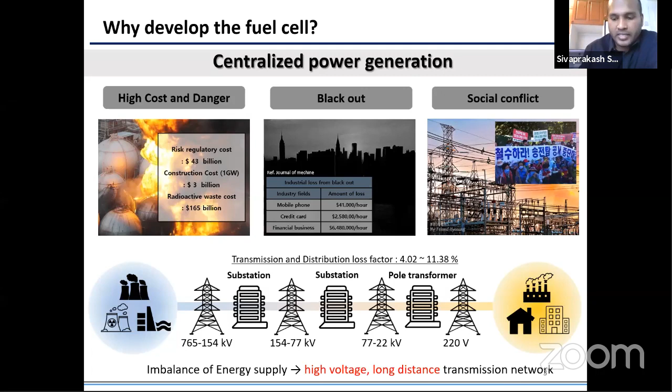Along with that, the transmission and distribution loss factor is also very huge, about 4 to 11%, from electricity produced at the power plant, from thermal or solar power plants, and then transmitted to the household. It takes about 4 to 11% loss factor. So this is the reason why we need to develop distributed power generation.

Here in Masdar City, UAE, they developed an off-grid system, which was not connected to the central power transmission. It was connected with localized power. And the second advantage is the construction of a localized power unit takes very little time; within a 1 year time frame, we can construct a megawatt power unit plant. However, construction of a thermal or nuclear power plant takes about 5 to 10 years.

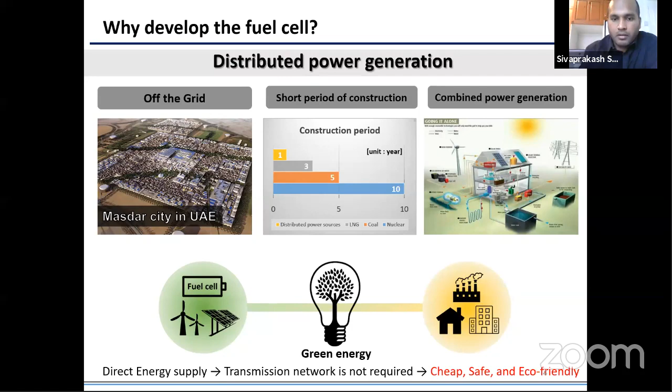Again, localized power generation, for example a fuel cell, can be combined with other power generation technologies, including solar, wind, and geothermal. And since energy is produced locally and it is green energy, it will not have any adverse or negative impact on the global environment.

So there are a variety of fuel cell choices available, including the polymer electrolyte membrane fuel cell, which operates at 70 degrees Celsius, phosphoric acid fuel cells, which operate at about 200 degrees Celsius, and molten carbonate fuel cells, which operate at about 650 degrees Celsius. Solid oxide fuel cells work from 800 to 1000 degrees Celsius. But the important thing is solid oxide fuel cells can cover the whole range from mobile applications to stationary power plants.

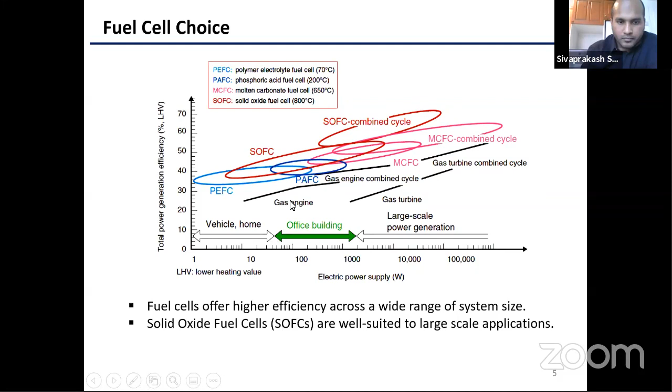Types of fuel cells. There are various types of fuel cells, classified based on their operating temperature. Solid oxide fuel cells work at 700 to 1000 degrees Celsius. The main difference is the electrolyte material. Here stabilized zirconia, a ceramic membrane, is used as the electrolyte, and the efficiency is about 45 to 65% for power alone. When combined with gas turbine engines to capture the waste heat, the efficiency can go over 90%.

The second type of fuel cell is the molten carbonate fuel cell, which operates at about 650 degrees Celsius. The electrolyte is molten carbonate, and the efficiency is only about 45 to 50%. Phosphoric acid fuel cells work at 200 degrees Celsius, the electrolyte material is phosphoric acid, and the power generation efficiency is 35 to 42%.

The fourth one is the polymer electrolyte membrane fuel cell, or PEM fuel cell, which works on an ion exchange membrane, for example the Nafion membrane, and the efficiency is about 35 to 40%.

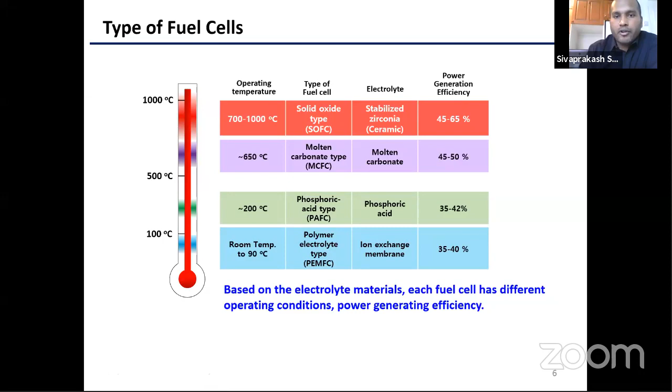Based on the electrolyte materials, we can use different types of fuels for the fuel cells. Among all the fuel cells, stabilized zirconia is an oxide ion conductor, where we can put basically any type of carbon fuels, hydrocarbon fuels or hydrogen. Whereas with the ion exchange membrane, we can only use pure hydrogen, about 99.9% hydrogen, as the fuel. But in solid oxide fuel cells, we can give all carbon or hydrocarbon fuels, which may contain sulfur or other contaminants.

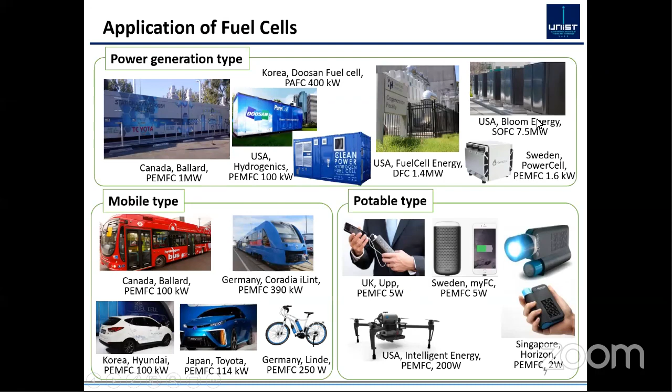Fuel cells are widely used. Applications range from stationary power to mobile power and portable power. For example, here in the US, Bloom Energy is the first company that started commercializing solid oxide fuel cells, and they were installed in many corporate offices, including Google, Tesla, everywhere.

The mobile type fuel cells are mainly used in electric vehicles and hydrogen-powered cars. They mainly use the polymer electrolyte membrane as the ion exchange membrane and pure hydrogen as the fuel. For portable power, there are startup companies available now, but it is still not commercialized.

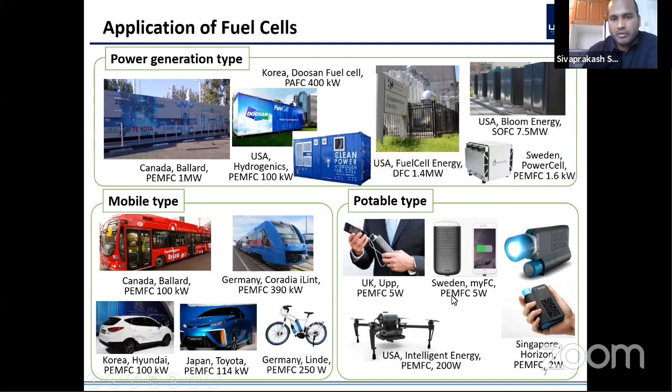I'm showing here the status of fuel cells around the world. Bloom Energy is the first company that commercialized solid oxide fuel cell technology.

Sorry that I put everything in Korean. I prepared this a very long time ago.

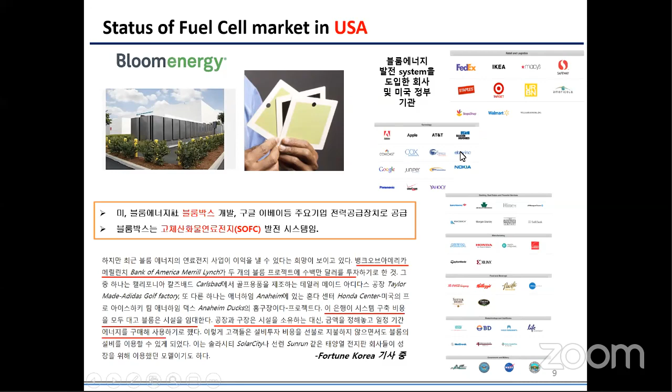Many corporate offices have stationary power units fully powered by solid oxide fuel cells, including tech company offices like Google. Newer companies like GE are working on solid oxide fuel cells, and they claim their efficiency is about 95% when waste heat is captured with gas turbine engines.

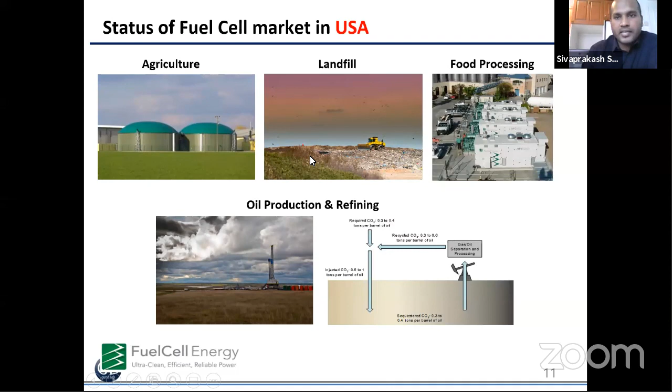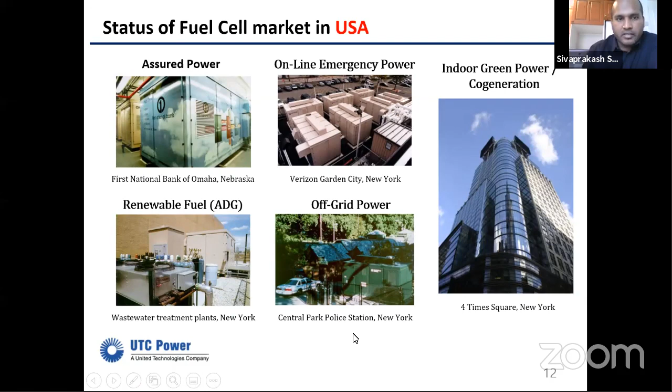In Japan, Kyocera is another company. They're working on solid oxide fuel cells with the LSGM electrolyte, a lanthanum strontium gallium magnesium based electrolyte material. This was combined with a home boiler, where we can simultaneously generate power and heat the home, thermostat controlled.

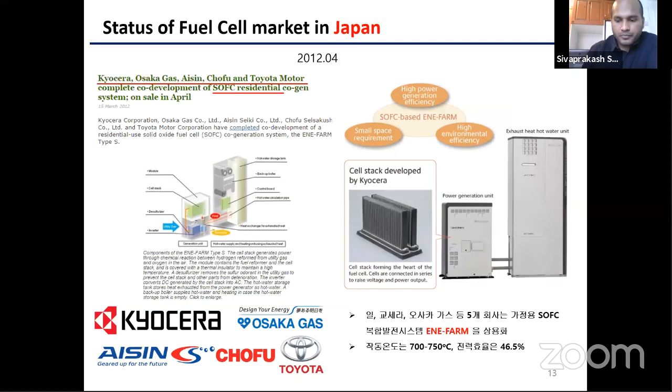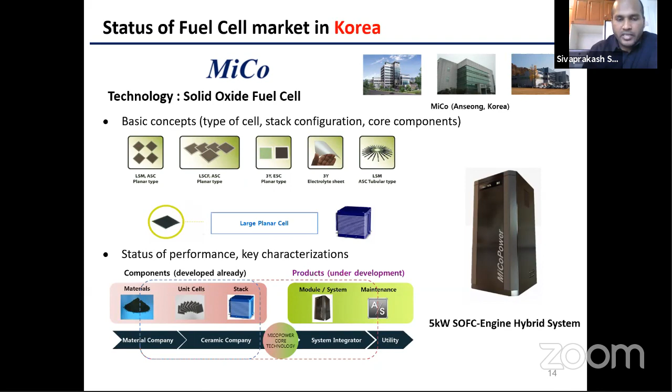In Korea, there is a new company called Mico Corporation. They started to develop solid oxide fuel cell technology. They are now at the stage of preparing the cells, and their plan is to construct a 5 kilowatt SOFC hybrid engine to install in various government sectors, particularly universities.

So I'm going to give an overall introduction to the basic principles of solid oxide fuel cells. Solid oxide fuel cells are electrochemical reactors which convert chemical energy directly into electrical energy. Like other types of fuel cells, solid oxide fuel cells have three main components: the anode, the electrolyte, and the cathode.

The anode is mainly composed of nickel and zirconia composite materials, the electrolyte is mainly composed of a stabilized zirconia ceramic membrane, and the cathode is composed of perovskite materials like lanthanum strontium manganite or lanthanum strontium cobaltite.

So in the cathode, first the oxygen gets reduced with the electron, and then moves towards the anode through the electrolyte, and then in the anode, hydrogen reacts with the reduced oxygen to form water, and then power is generated in the external circuit. Water is formed in the anode compartment.

Whereas many people are familiar with the polymer electrolyte membrane fuel cells. In polymer electrolyte membrane fuel cells, oxygen gets reduced in the cathode, and then the fuel gets oxidized and then moves towards the cathode, and then water is formed in the cathode compartment. Whereas in solid oxide fuel cells, oxygen ion is conducting from the cathode to the anode. Because of this reason, water is formed at the anode compartment.

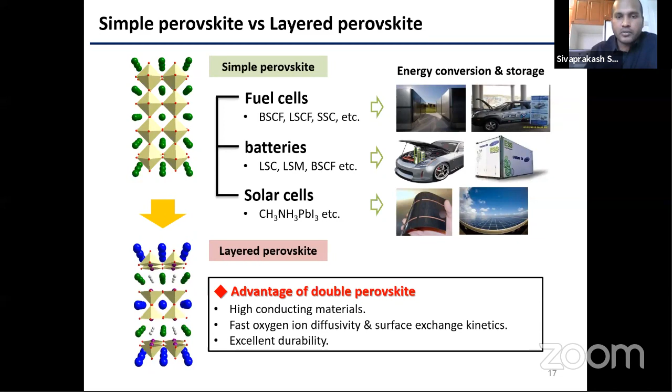So high conduction gives fast conduction of oxygen ions, and fast oxygen ion diffusion and surface exchange coefficient improve the oxygen reduction reaction at the cathode even when we decrease the operating temperature of the fuel cell, and it shows excellent durability. Durability means there will be no degradation even when operating the fuel cell over 3,000 or 6,000 hours.

So the simple perovskite structure is shown here, and the general formula is shown here, ABO3, where A is the lanthanide series elements, B is the transition metal, O is oxygen, and delta is the oxygen vacancy. Here you can see that lanthanide series elements are on the corners of the cube, and in the center of the cube is the transition metal. Oxygen is present on the octahedral sites, and oxygen vacancy is present here. So this vacancy basically gives the conduction mechanism to move the oxygen from one side to another side.

So various examples of simple perovskites are given here. Barium strontium cobalt iron: barium is the A site, strontium is also substituted on the A site, and cobalt iron is the transition metal on the B site. Here in lanthanum strontium cobalt iron, the lanthanide is the A site, and cobalt iron is the transition metal.

So for doping here, the oxidation state of lanthanum is 3+, and the strontium oxidation state is 2+. So doping a lower valence state on the A site, within the lanthanum site, creates the oxygen vacancy, which is the main path for oxygen ion conduction here.

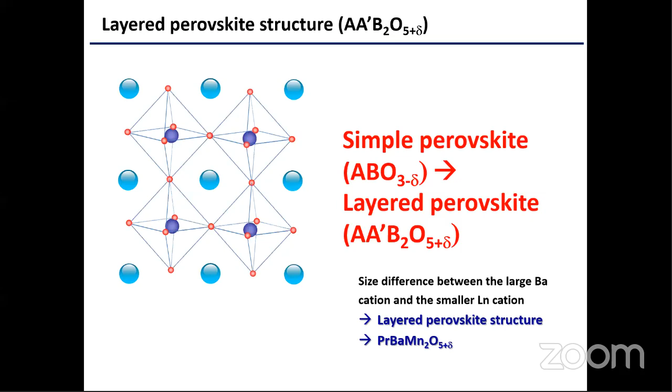As I explained before, I have shown here the simple perovskite structure. These are the A sites, and here is the transition metal B site, and then oxygens are present on the octahedral sites. So how we can visualize the double perovskite is when we start doping a higher radius cation in the A site. For example, in the lanthanum site, we start doping larger radius barium. The A site changes its structure from a simple perovskite to a layered perovskite structure.

Here you can see that these are the barium, these are the lanthanum series, and then the transition metal. Because of this, the layered structures are formed. In one layer only barium is present, and then here lanthanum is present, barium is present, lanthanum is present here. For this reason, we call this a layered perovskite material. This formed because of the size difference between the barium and the lanthanum cations. Here is the unit cell where we can see the double perovskite.

And then I will go to the electrode requirements. A good electrode should be catalytically active to allow operating at low temperature for oxygen reduction reactions and enhance the active site density. In the case of the anode, it should be catalytically active for hydrogen oxidation or fuel oxidation reactions. The second requirement is it should be highly conductive for electron transport, and at the same time it should be ionically conductive for oxygen ion transport.

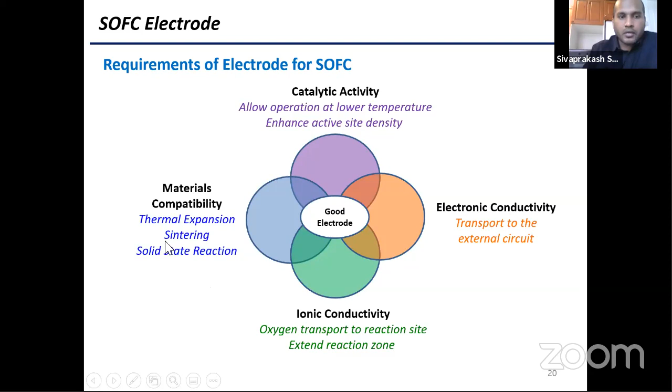And then the fourth requirement is the material should be compatible with other components of the fuel cell. For example, if the anode and electrolyte have different thermal expansion coefficients, after sintering or fabricating the fuel cell, the anode and electrolyte detach at their interface. So the material should be compatible with other components, so that there will be a low interfacial resistance.

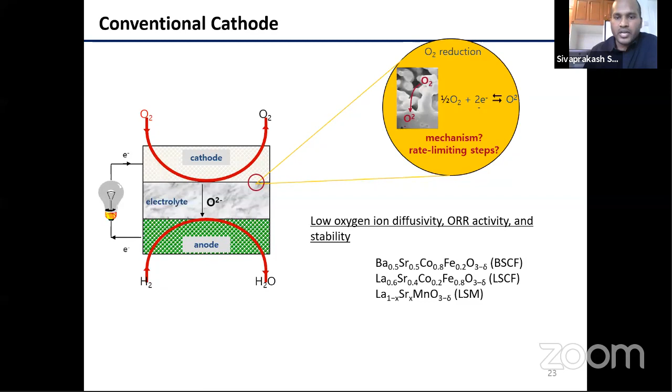In conventional cathodes, where barium strontium BSCF, LSCF or LSM materials are used, the main disadvantage is that the oxygen reduction reaction is very sluggish. Conventional fuel cells operate at 1000 degrees Celsius. When we decrease the operating temperature, the oxygen reduction reaction becomes very slow, and the overall efficiency of the fuel cell goes down. So we need to find a better cathode for the oxygen reduction reaction at lower temperature, between 700 and 800 degrees Celsius. So first we developed a layered perovskite material, praseodymium barium cobalt oxide.

This material shows high oxygen diffusion and surface exchange coefficients, D and K: D is the oxygen diffusion, K is the surface exchange coefficient. It has high oxygen transport kinetics. Doping a little strontium in the barium site increases the conductivity and the catalytic activity of the layered perovskite. But doing this, there are disadvantages: a large thermal expansion coefficient, poor stability, and high cost.

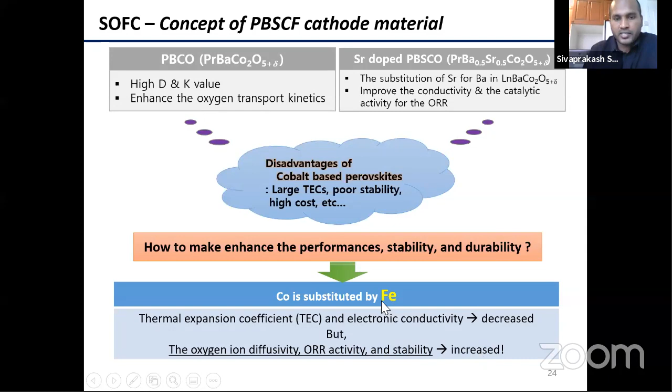Due to this, we started working on replacing the cobalt with iron, so that the thermal expansion coefficient will be matched. It shows high electrical conductivity. Although it decreases the electrical conductivity, it is still enough for current collection in the fuel cells. The second advantage is that the oxygen diffusion and oxygen reduction reaction stability was increased by doping iron in the cobalt site.

Then we found praseodymium, barium, strontium, cobalt, iron as an active cathode material for solid oxide fuel cells. So based on this, we fabricated fuel cells with ceria as the electrolyte. Instead of stabilized zirconia, we used stabilized ceria as the electrolyte, nickel as the anode, and praseodymium, barium, strontium, cobalt, iron as the cathode material. We performed the fuel cell test at 650 degrees Celsius. It shows about 3 watts power density. At low temperature, about 500 degrees Celsius, it's about 0.5 watts power density.

Next we checked the stability of this material. This praseodymium, barium, strontium, cobalt, iron oxide shows very stable performance over 100 hours, whereas without iron, it shows a sharp degradation. The simple perovskite BSCF also shows a sharp degradation when decreasing the temperature of the fuel cell.

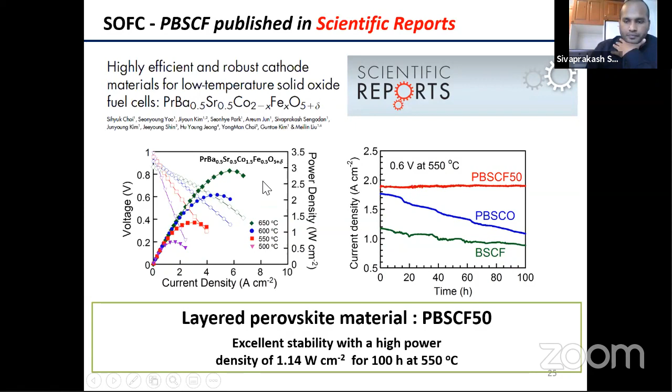Then we started working on layered perovskite materials to use as the anode material in solid oxide fuel cells. We found praseodymium, barium, manganese oxide as a very good anode material for solid oxide fuel cells. So a question arises: why do we need to develop a good anode for solid oxide fuel cells, although a very active nickel material is available?

This is the answer. In conventional fuel cells, hydrogen is used as a fuel. This hydrogen is produced externally by hydrocarbon reforming, or hydrocarbon can be directly fed into the fuel cells, where it needs internal or external reforming. Because of this, the efficiency of the fuel cell is decreased by 30%. But pure hydrogen is very hard to produce and expensive, and we don't have a good infrastructure to transport the hydrogen.

The next available option is hydrocarbon fuels. Can we use the hydrocarbon fuels directly? We can use our existing infrastructure, the pipelines or gas cylinders. The second advantage is that we have experience in transporting hydrocarbon fuels like LPG, methane or propane. Additional processing such as reforming can be reduced, so efficiency can be increased. Another advantage is that hydrocarbon fuels are highly efficient, cheap and useful. We can use LPG, methane, propane, octane, ethanol, even solid carbon.

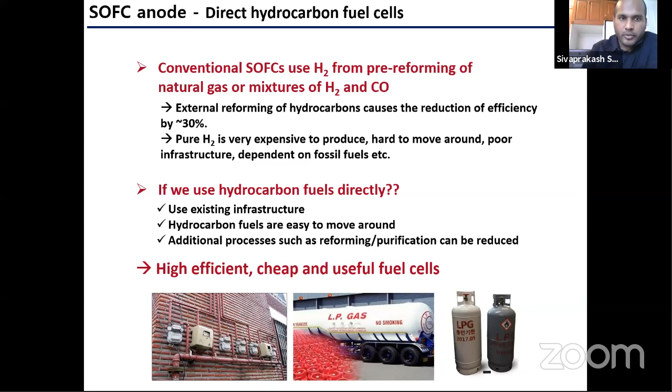But what is the disadvantage of using nickel as the anode material? The conventional anode is nickel and stabilized zirconia, a composite material ball milled in different 30-40 ratios, and then the anode is fabricated. It shows high electronic conductivity, excellent activity for clean reformed fuels, that is pure hydrogen, and is chemically and physically compatible with the zirconia electrolyte. It will not react with the other fuel cell components.

But when we use hydrocarbon as the fuel, it undergoes severe degradation because nickel is a very good carbon catalyst, so carbon fiber is formed on the nickel. This carbon fiber eventually breaks the fuel cell, even within 1 or 2 hours of operation. The second disadvantage is that we start with nickel oxide as the electrode material in the nickel cermet anode, and once we start operating the fuel cell, nickel oxide is converted to metallic nickel.

In metallic nickel, the fuel cell is operated. Once we decide to stop the fuel cell and shut it down, the nickel is again converted back to nickel oxide. Because this nickel oxide converts to nickel and then back to nickel oxide, a huge volume change occurs in the fuel cell anode. This volume change eventually breaks the fuel cell.

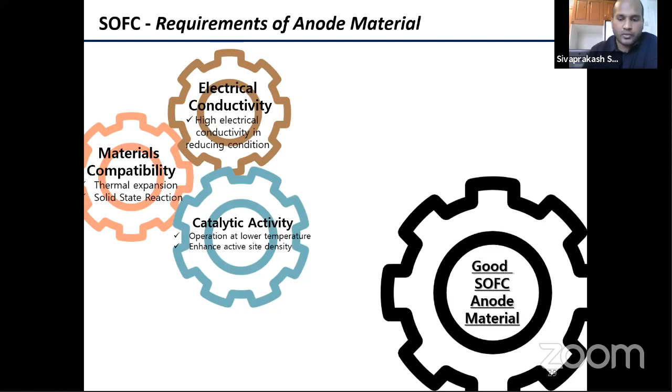A good fuel cell anode material should be compatible with the other fuel cell components like the electrolyte, matching its thermal expansion coefficient. It should be catalytically active for hydrocarbon fuel oxidation. It should be highly conductive to conduct the electrons from the anode externally to the cathode. It should show good carbon tolerance and sulfur poisoning tolerance.

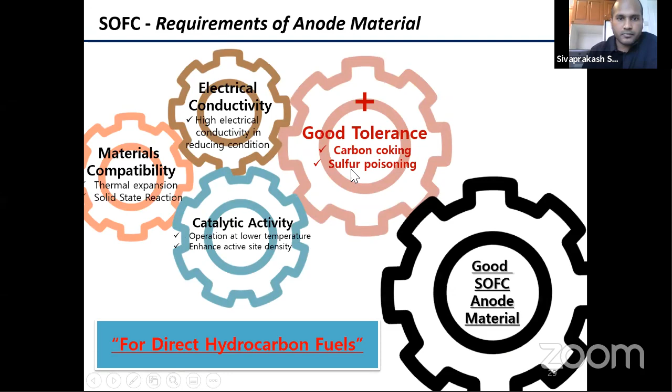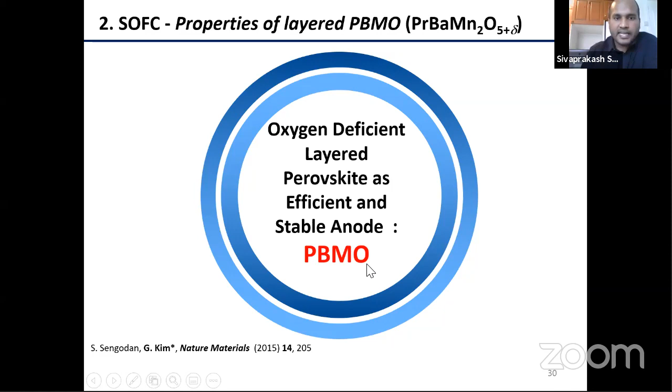Based on these requirements, I have developed a new anode material, praseodymium barium manganese oxide, as an alternative anode material for solid oxide fuel cells. It shows very good structural properties and high electrical conductivity, about 10 Siemens per centimeter in 5% hydrogen. These are the other alternative anode materials: lanthanum strontium chromium manganese oxide shows about 1 Siemens per centimeter.

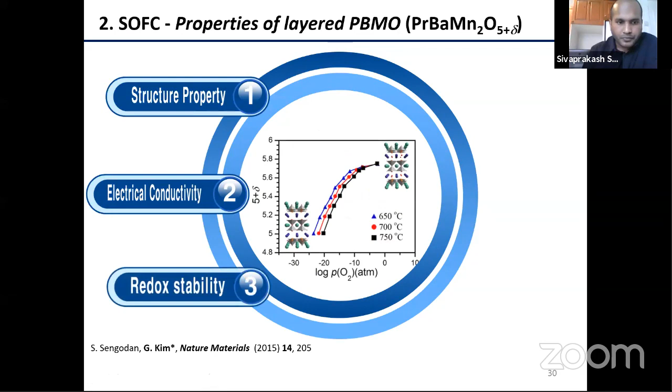And another double perovskite material, SMMO, strontium magnesium molybdenum oxide, shows about 5 Siemens per centimeter in 5% hydrogen at 800 degrees Celsius. But my material shows about 10 Siemens per centimeter in 5% hydrogen, and it is also redox stable.

And the stability is also very good; it does not show any degradation for more than 500 hours in carbon-containing fuels. Whereas if I use a nickel-containing electrode material, degradation will be very, very quick. Even within 1 hour, it goes down.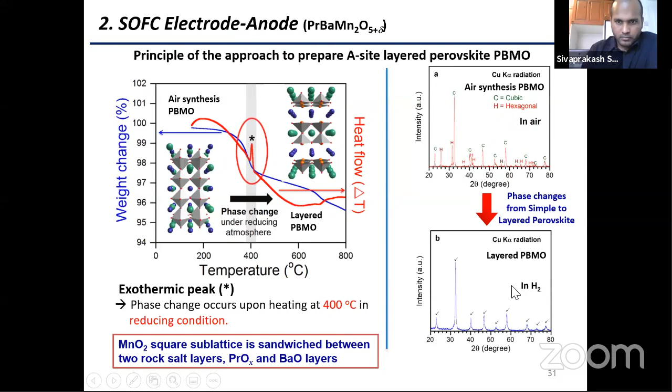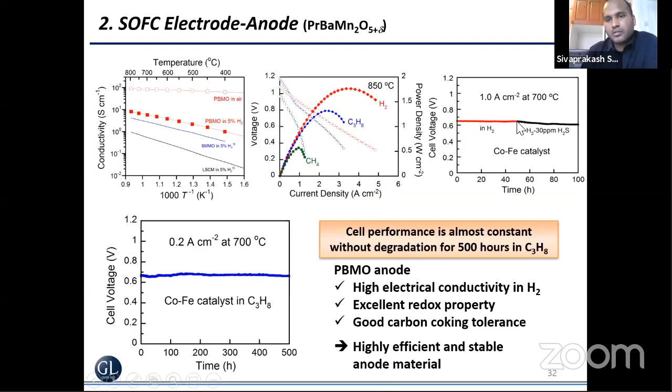This shows the performance of praseodymium barium manganese oxide. In hydrogen, it shows a very stable performance. But when we switch the fuel from hydrogen to 30 ppm sulfur-containing fuel, still it's stable. There is no substantial degradation observed, and 1% degradation is allowed in fuel cell technology.

So other applications of layered perovskites are symmetrical solid oxide fuel cells. In symmetrical solid oxide fuel cells, the advantages are easy fabrication, minimum compatibility problems, and elimination of sulfur and coke formation. In solid oxide fuel cells, I showed before that the cathode is a different material, the electrolyte is a different material, and the anode is a different material. In a symmetrical solid oxide fuel cell, the concept is using the anode and the cathode as the same material. For example, material A is used as the anode, and the same material A is used as the

cathode here also. So when we use hydrogen or hydrocarbon as the fuel, even though carbon is deposited on this side, we can switch the fuel from the anode compartment to the cathode compartment, so that the deposited carbon is exposed to the oxygen-containing atmosphere. This deposited carbon will be oxidized to carbon dioxide. So then the fuel cell is reversed. When switching the fuel from the anode to the cathode compartment, the reaction flows in the opposite direction.

Similarly, when sulfur-containing fuel is exposed to the anode, there will be degradation. So when we stop the sulfur-containing fuels and switch from the anode compartment to the cathode compartment, the sulfur deposited on the anode materials will be converted to sulfur dioxide or other sulfur oxidized products when we expose it to oxygen, so that the cell will keep running continuously without any stopping or interruption.

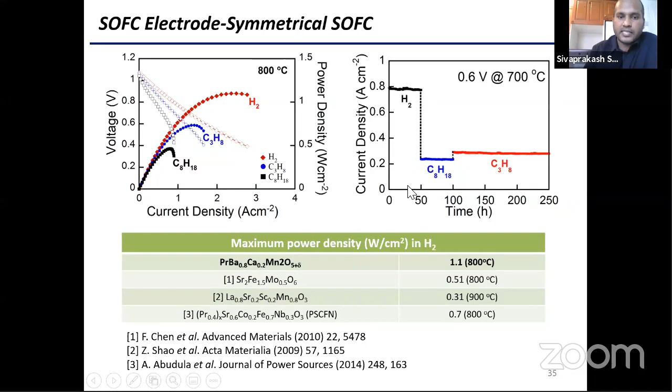Then we switched it to jet fuel. There is no degradation also. Then we changed it to propane. There is also no degradation. This shows that this layered perovskite material can be used as a symmetrical electrode material for solid oxide fuel cells.

Now I'm currently working on solid oxide electrolysis and solid oxide cells. Solid oxide cells are a combination of solid oxide fuel cells and solid oxide electrolysis cells. Considering there is excess power generation, we need to store the energy. So using solid oxide electrolysis cells, we can use water when there is excess power.

We use water, and we can split the water into hydrogen and oxygen, and the oxygen goes to the air electrode, and the hydrogen is stored as a fuel. When there is a power depletion, this hydrogen can be fed into the same fuel cell, and water is produced, and the power is generated.

This concept is like when there is excess power, we can store the energy in the form of hydrogen by converting water into hydrogen in electrolysis mode. When there is a power depletion, the stored hydrogen can be used as the fuel for the solid oxide fuel cell mode. So this is the combination of both solid oxide fuel cell and electrolysis cell.

So here I showed the SOECs, solid oxide electrolysis, and then the combination of solid oxide electrolysis cells using praseodymium barium manganese oxide as the electrode material, the fuel electrode. And in electrolysis mode, the current density is about 1.31 at 1.3 volts per centimeter square, and then in fuel cell mode, we can generate about 2 ampere per centimeter square.

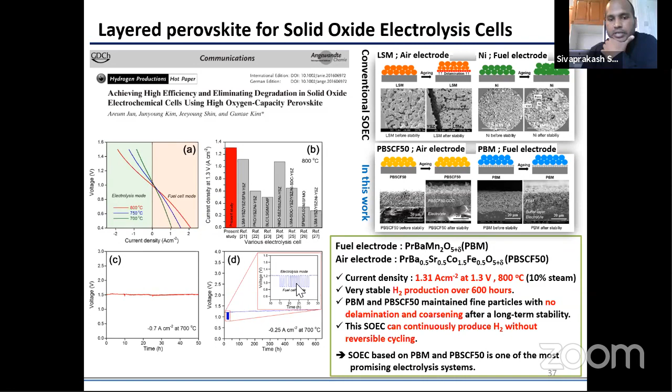So in conclusion, we developed a layered perovskite material which shows a very high performance in solid oxide fuel cells, symmetric solid oxide fuel cells, and combined solid oxide fuel and electrolysis cells. Due to time restriction, I didn't show the application of layered perovskite material in protonic ceramic fuel cells and metal air batteries. Thank you.

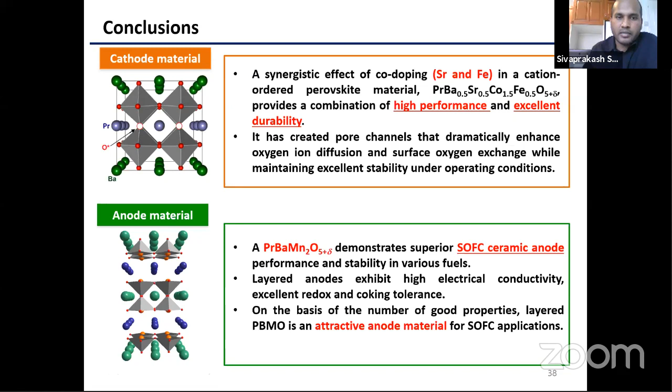Any queries? Hello. Any queries? I think most people don't understand because I'm a material scientist. You people are like chemical engineering, where they do the modeling and the heat and mass transfer. Shall I conclude? Yeah, Ganesh. Oh,